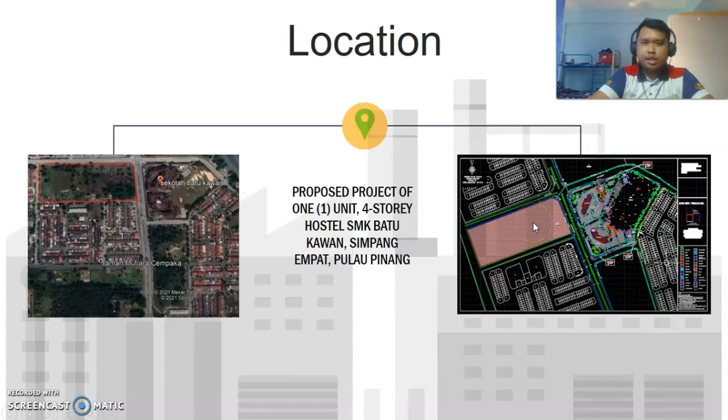This is the location for our project, located at Jawi, Pulau Pinang. The population at Jawi is about 10,000 people, mostly Muslim. This is the area for SMK Batu Kawan, from Google Earth, and this is the drawing for the proposed site for this project location.

This is the timeline for the infrastructure work. We started with the earthwork, then moved to the road and drainage system, then to the sewage system, next the water reticulation system, and lastly the landscape.

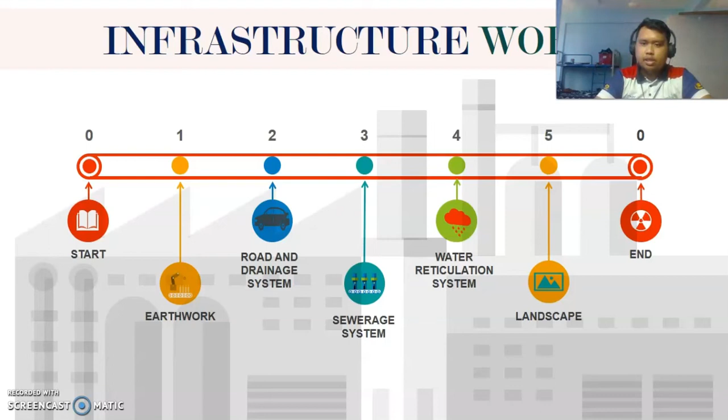So earthwork, what is earthwork? Earthwork is a process whereby the surface of the earth is excavated and transported to and compacted at another location. For the earthwork process, there are several things we need to do, such as site clearing, cut and fill, silt trap, topsoil stripping, and others.

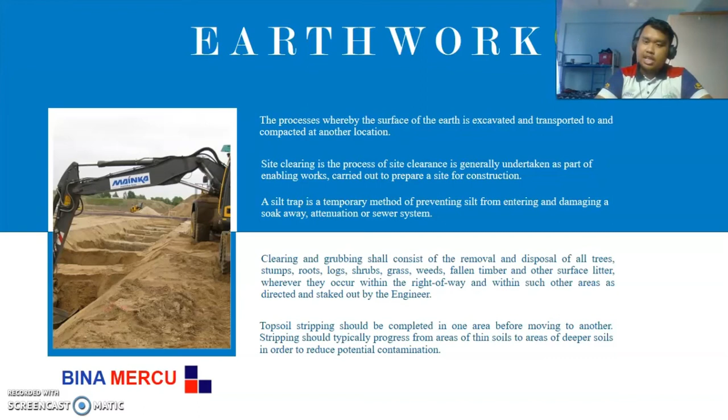So this earthwork process, we need to make sure all the processes are in good condition. Topsoil stripping should be completed in one area before moving to another. Stripping should typically progress from areas of thin soil to areas of deeper soil in order to reduce potential contamination. So this is the earthwork.

Next is the road and drainage system. This has six processes: first is to receive the survey and project layout drawing by the architect or client, then estimate the ground level from the survey drawing for road and drainage design, then design the flexible pavement with JKR standard guidelines. The JKR standard we use is ATJ, arahan teknik jalan.

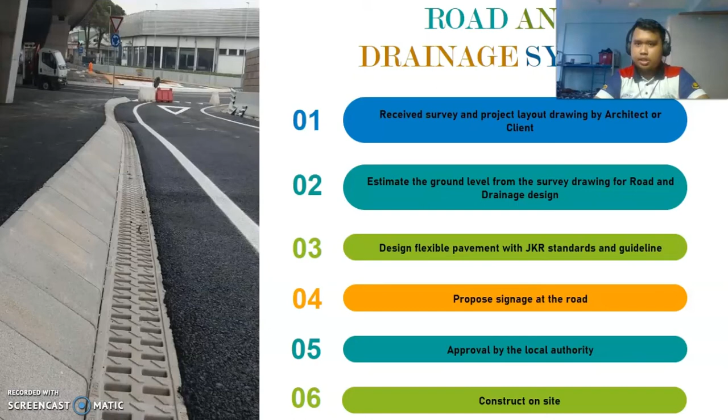Next is proper signage of the road, which we need to propose. And next is approval by the local authority. For your information, the local authority at this proposed project is Majlis Perbandaran Seberang Perai, MPSP. And next is construction on site.

Next, we go into the sewage system. This is the calculation so we know how much we need to grow the sewage system. So this is the calculation.

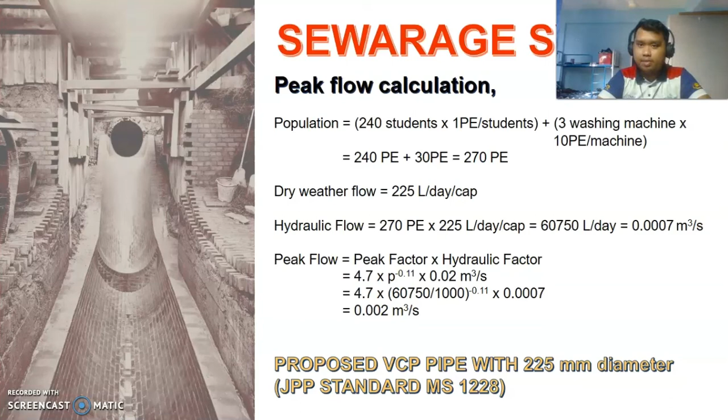We are going to use JPP standard MS 1228. Our proposed drainage is a VCP pipe with a 225 millimeter diameter, using the Manning formula. From this, the 225 millimeter VCP pipe is suitable and safe to use, as the pipe capacity is more than the peak flow, fulfilling the requirement of the JPP standard MS 1228.

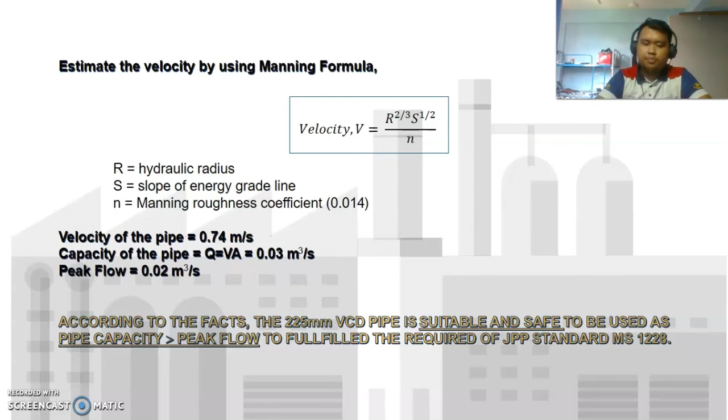So this is the water reticulation system. What is the water reticulation system in general? It assists water to move from the source to the consumer. The volume of water required is another factor to consider when arranging and planning the system.

What are the activities in the water reticulation system? We have four activities. First is the setting out, where all pipe laying work shall be performed by the contractor's surveyor. Next is the excavation — we need to excavate the pipe trench, and before commencing excavation, the route of the pipeline shall be marked out accurately.

Next is pipe work, the most important activity, which involves handling, laying, and testing the pipeline. This shall comply with the latest technical specification from SPAN, the Suruhanjaya Perkhidmatan Air Negara, or other relevant standards, and also the manufacturer requirements, such as from Syarikat Air Pulau Pinang and others.

Next is the external water storage tank. The contractor should supply a new tank reservoir from a manufacturer specializing in the design, fabrication, or erection of approved water storage tanks. So this is all the activity of the water reticulation system.

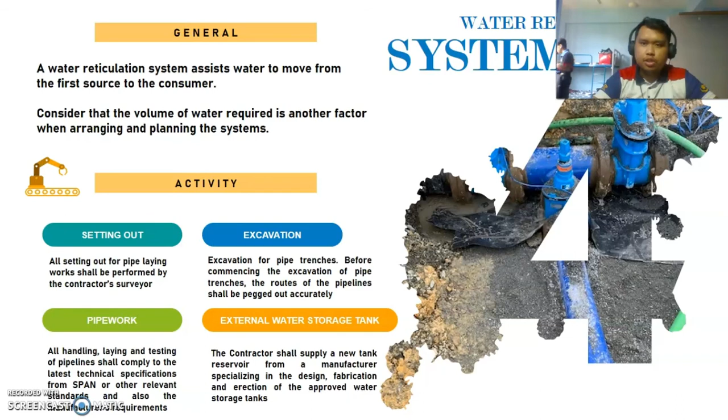Next and lastly is the landscape. What is the suitable landscape for our project? A suitable landscape is designed to be both interactive and in balance with the local climate and environment, and should require minimal resource input. To design the suitable landscape, it must be functional, cost efficient, environmentally friendly, and maintainable.

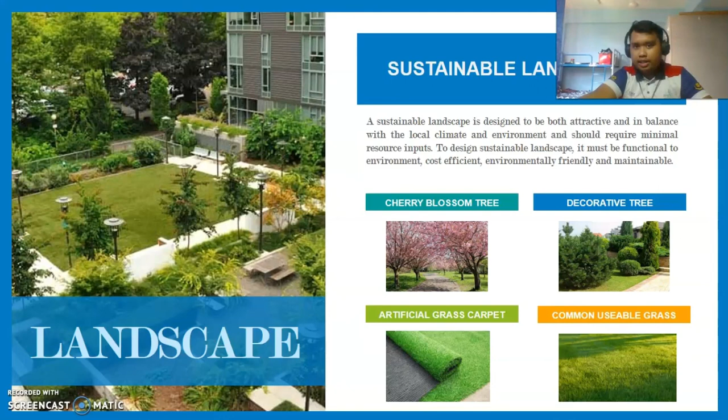So this is our proposed sustainable landscape: first is a cherry blossom tree, next is a decorative tree, artificial grass carpet, and lastly common usable grass. This is our purpose for the landscape in this project. So that's all from us. Thank you.